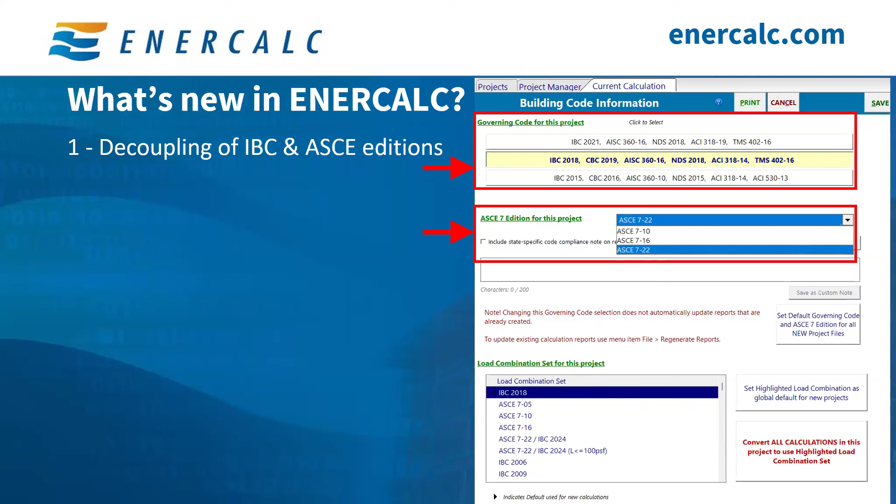This is also applicable to load combinations. Load combinations have always been decoupled, so you can always pick and choose whatever load combinations you want to start from, and also use your own custom load combinations.

The second update is the addition of new ASCE 7-22 modules. We started with adding new tabs. So if you are on the latest and greatest, you will notice that in the add button where you typically go to get your calculations, we added these 3 new tabs. The first tab is the seismic loads, and we added a calculation for seismic base shear and another for seismic wall anchors. So you can do this right here.

Next, the wind load. We added another tab for wind loads, and we currently have implemented calculation modules for the ASCE 7-22 wind enclosure, the envelope procedure, which is chapter 28, and the directional procedure, chapter 27. And currently, the components and cladding pressure determination methodology for chapter 30 of the ASCE is under active development. Once it's done, it will appear right here under this tab as well.

The last tab we added is the Other Loads tab, and this currently includes a calculation for ASCE 7-22 live load reduction, but will also have some other calculations such as the snow load and snow drift calculations.

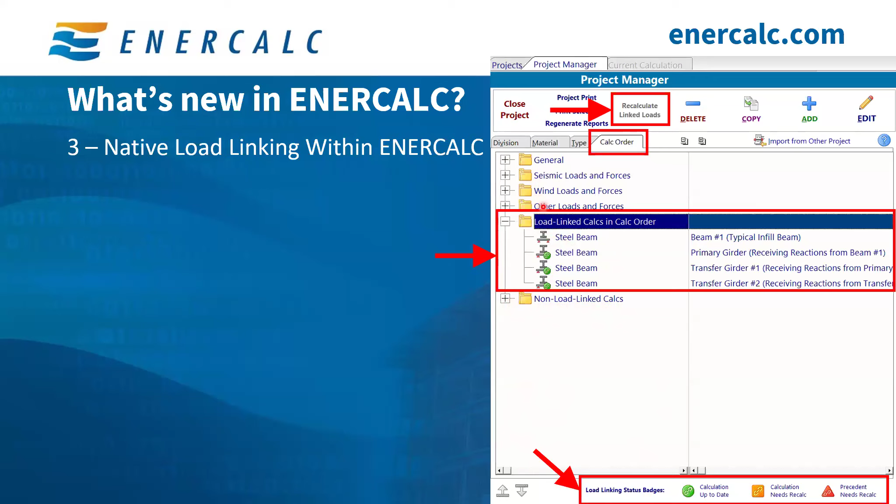Also, if you click on the Calc Order tab, you can see we have a folder that says Load Linked Calculations in the proper calc order. And if you had other calculations that don't have any linked reactions in them, you will see here that it says Non Load Linked Calculations. You can click on this to expand it and see all of the other calculations that don't utilize load linking. So this is also just good organization for you, so you can know at first glance what is going on with your calculation.

So if you are inside the steel beam calculation, you can see here that we have a brand new tab that's called Linked Loads. And you can grab whatever reactions from whatever calculations you have in your ENERCALC project file. Once you click on Linked Loads, you can see right here it says from beams, and this one says from columns. From beams will show you all of the other steel beam calculations that you've already created in this project folder, and you can pick whichever one you want to get a reaction from.

And as you cycle through these beams, this 2D diagram, this free body diagram, changes to reflect what beam you selected. This is a good way to help jog your memory in case the naming was not descriptive enough, or you couldn't figure out which calculation is which. You can always take a quick look at the free body diagram here to remember what calculation is what.

And you can also see the table right here below it, which shows the supports. So this is support 1, this is support 2. If you have multi-span, then you'll have multiple supports. And it shows you the reaction that's associated with each support point.

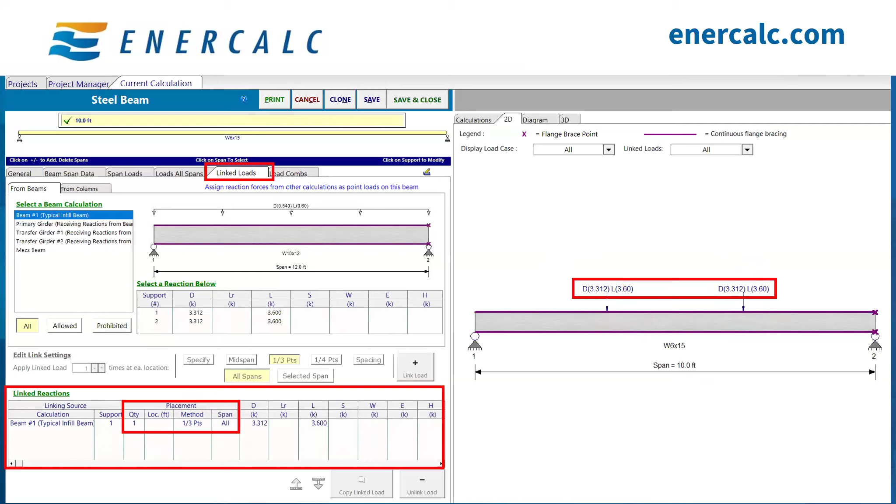Currently, the load linking feature within ENERCALC is supported for steel beams only. We want to hear from our users what we should support next. So load linking for wood beams is under active development right now. And when it's done, this means that you can carry reactions from a wood beam to a wood beam, wood beam to steel beam, and steel beam to wood beam. So every new integration we add for load linking will be functional with all of the other previously integrated modules.

So with that said, we have a survey for our users to tell us which module we should implement next. If you remember earlier, you can grab reactions from beams, and there was another tab right here that says from columns. If you click on that tab, you will find the link to the survey right here. We here at ENERCALC prioritize implementation of feature requests based on how many users requested. So that's how we picked the load linking of wood beams as our next candidate for development. But as of today, we have not decided which one to develop next.

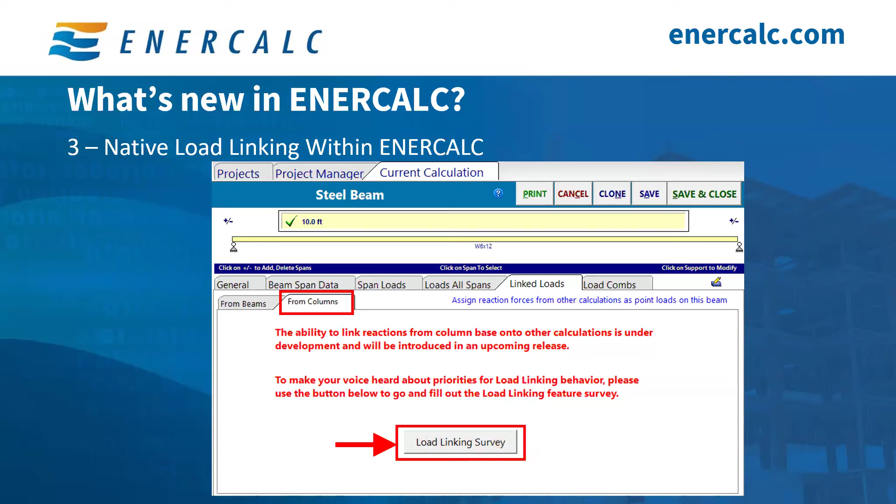So after the wood beam module is done and integrated, whatever the survey results tell us, we will go in that direction. So if you're interested in wood columns first or steel columns, please go ahead and cast your vote here, so we can take the development of our software in the direction that our users would like.

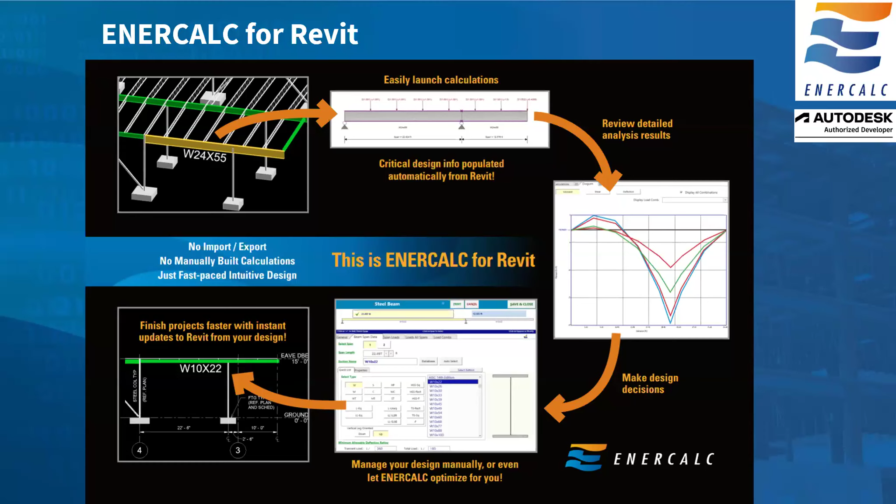So the idea behind ENERCALC for Revit is the schematic you see on screen right now, which is to basically start with your raw Revit geometry, easily launch calculations, interact with those calculations, and make design decisions in the environment that you're familiar with, and then progress into actually making design decisions and pushing information back to the Revit model in real time.

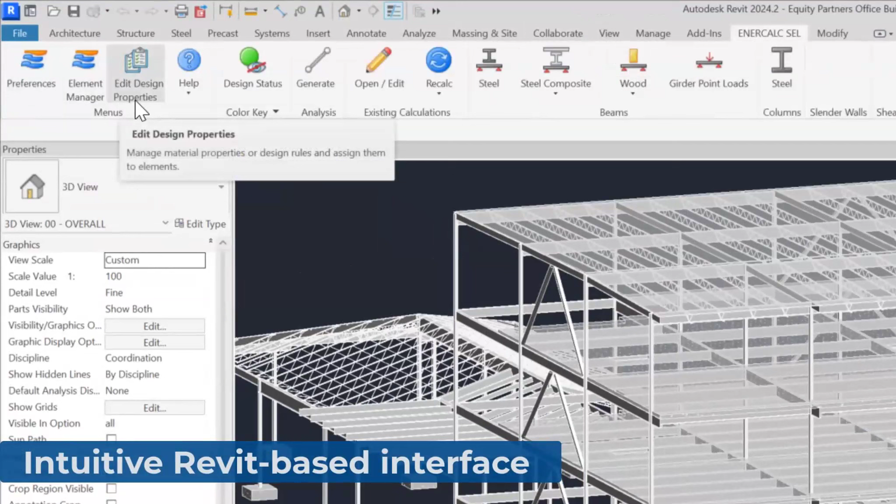So this workflow starts with a Revit-based interface when you install the ENERCALC for Revit add-in, the same environment where you would find your structure tools, your annotation tools, your collaboration tools. You'll find a new ribbon bar for ENERCALC, and this is where you find preference settings, element manager views to overview your calculations, color-coded slide-out legends to manage status and design completion, calculation launch and design option windows, the ability to actually generate your calculations on the fly from Revit geometry.

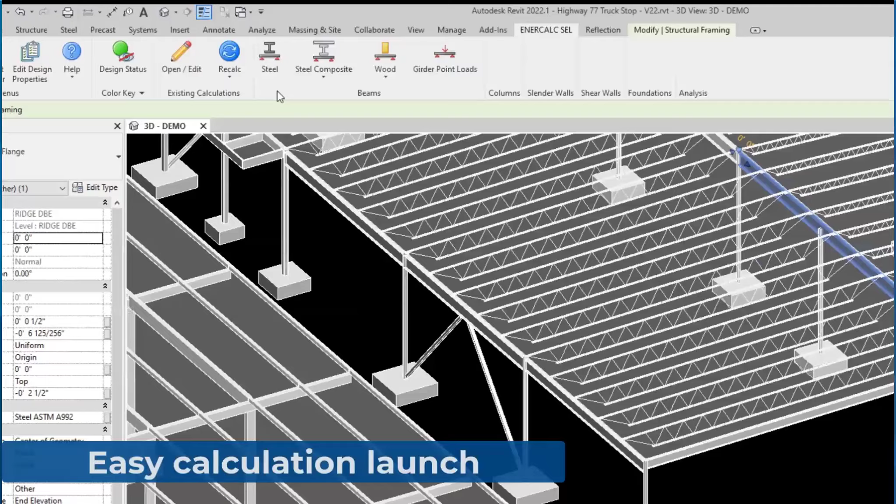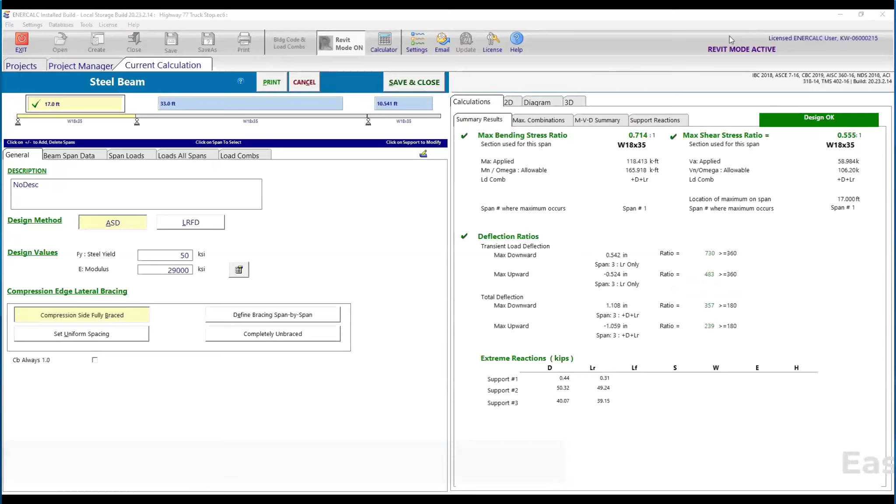So these calculations are actually created using what we call a one-click or a point-and-click launch process, where you just literally start by designating the physical element you want to create a calculation for, specify the type of calculation you want to create, and what this will actually do is begin to walk you through a launch process where you're actually taking advantage of real Revit geometry for things like support conditions, connective framing relationships, tributary framing conditions, a variety of information to actually build a complete replica in the ENERCALC calculation environment of the physical element that you just specified in the Revit model.

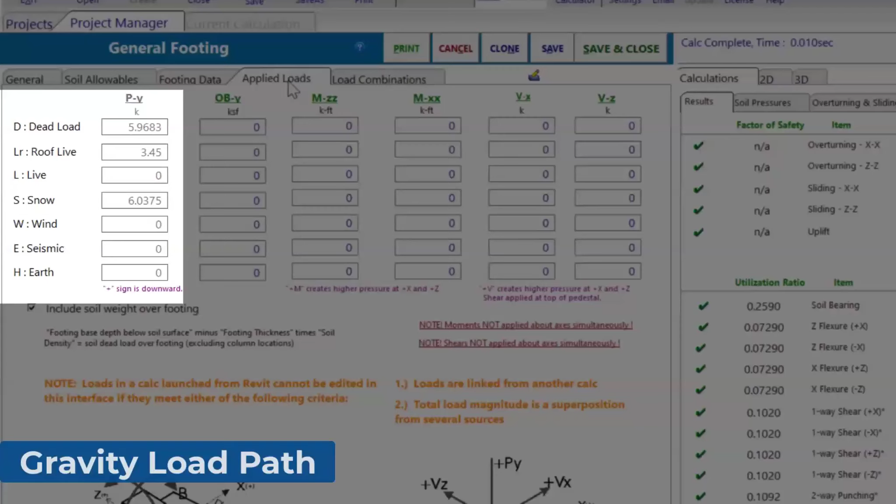So this opens up a whole variety of capabilities and productivity enhancements, including things like the ability to seamlessly move loads vertically through a structure, for example, from beam to a girder, to a transfer post, to a transfer girder, to another column, to a foundation, seamlessly inside the Revit model using physical model geometry, not having to curate analytical geometry on the fly, using the data that your structural engineering team has already generated to make your documentation look right, to perform your multidiscipline coordination, and so on.

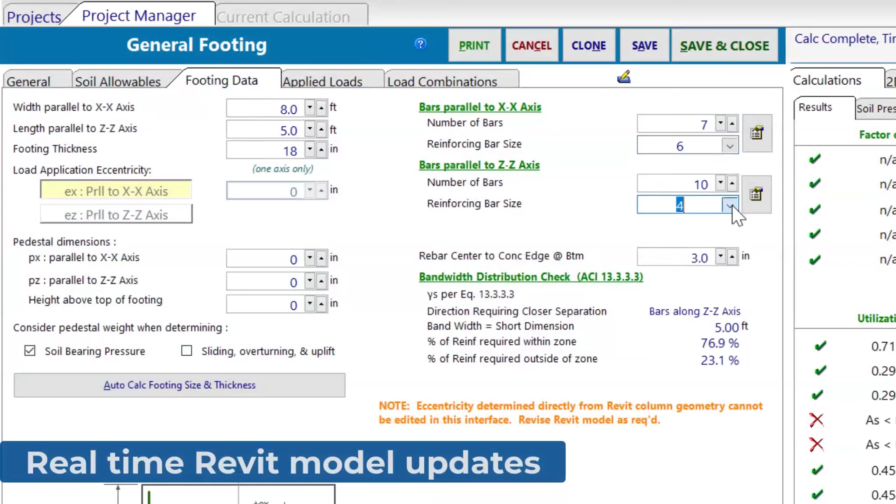And then obviously, you want to be able to short circuit the process of transferring design information from your calculation environment back to your documentation. And so the ability to push changes on the fly from an ENERCALC calculation back to the Revit model in real time will shorten your design times, accelerate your work, ease the documentation process by cutting out manual work and manual transcription, as well as reducing the risk of errors.

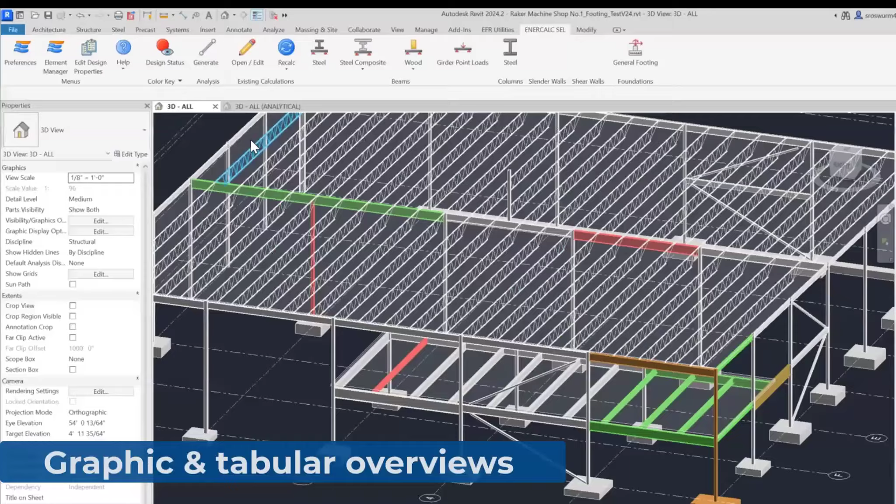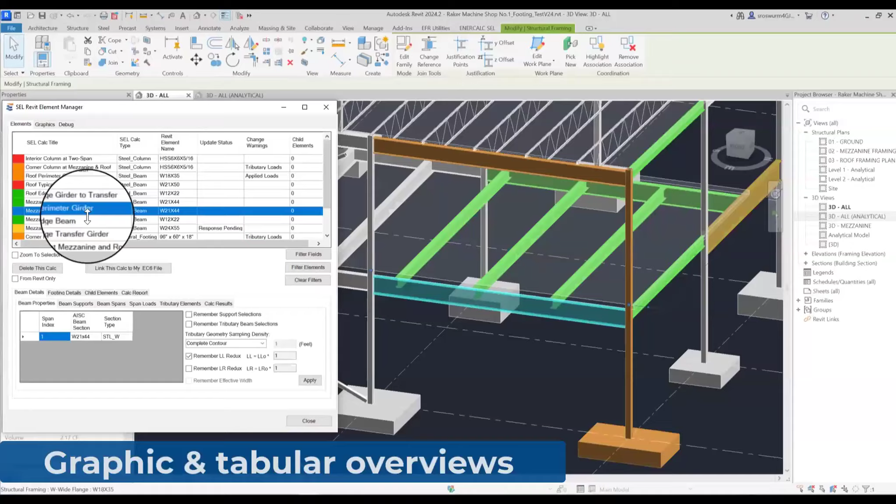Now, because Revit is such a rich graphical environment, ENERCALC for Revit also gives you the ability to have a lot of rich visualization of your design process. That includes everything from color coded design status and warning statuses to tabular views of your calculations, two-way navigation between tabular views and the actual model so you can see which physical element corresponds to which calculation, as well as vice versa, seeing which calculation correlates to which element if you want to navigate the tabular view or the model view. It's easy to see that correlation.

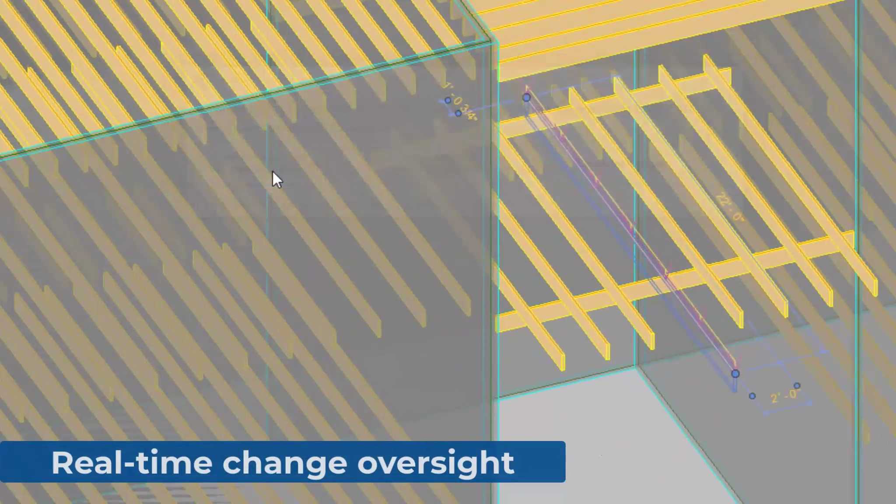Now, if there's one thing about a structural Revit model that never changes, that would be the fact that the model is going to change. And so when those changes do occur, you need the ability to stay on top of how those changes are going to affect the validity of your ENERCALC calculations. ENERCALC for Revit has a robust framework of monitoring systems that lets you be aware when critical geometry changes alter or modify the status of your calculation. And when those natural changes and evolutions do occur over time, you're going to have the ability to stay on top of them, know what changes have happened, understand why those changes occurred, and then go and take action accordingly.

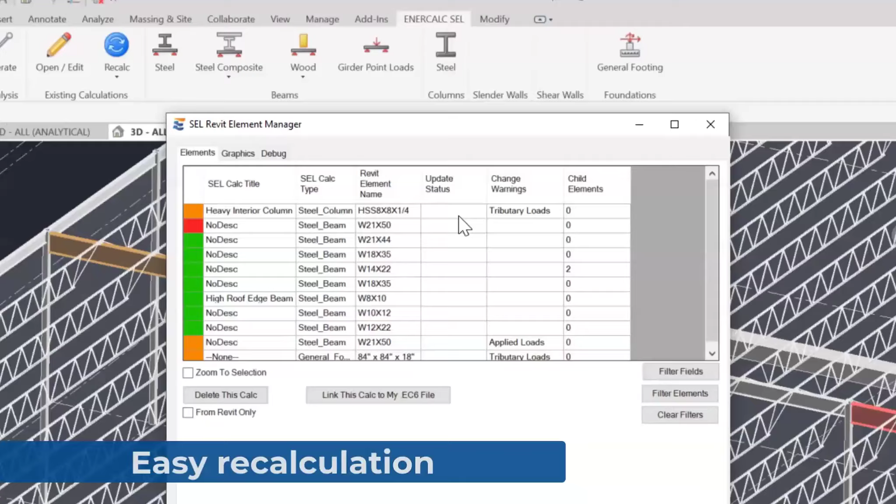For example, when we see that a whole framing system has undergone changes, we can now go and use ENERCALC for Revit's easy regeneration or recalculation tools to address those on the fly. So everything you guys are about to see includes the same version support that Autodesk provides for Revit itself. So that's the current version and three historical versions for a total of four.

ENERCALC for Revit uses that same approach. And so currently we support Revit 2022, 23, 24, and 25. It's usually in April when the next version of Revit drops. And so when Revit 2026 becomes available, probably this coming April, then we will eventually deprecate support for Revit 2022 and you'll see us release support for 2026.

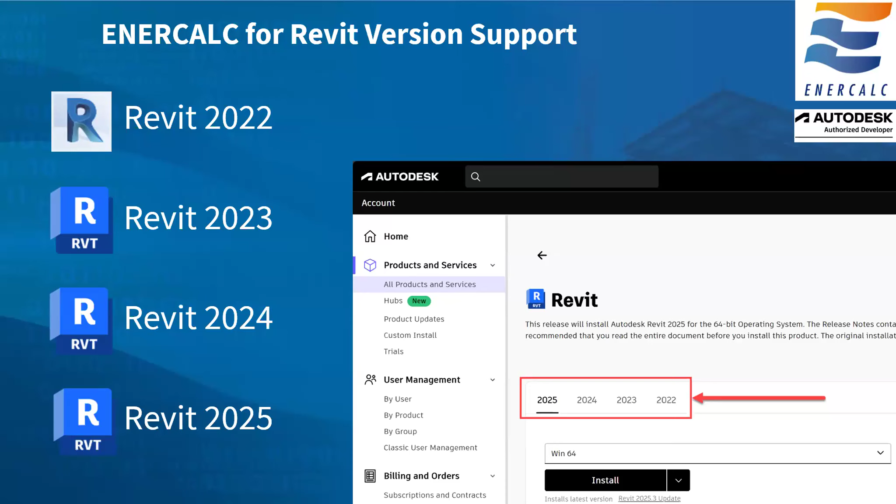So let's go ahead and dive into some real workflows and see how ENERCALC for Revit works and what that workflow actually looks and feels like. So, like I mentioned earlier, the process of creating a calculation is about as easy as it can be. We're just going to say we want to launch a steel beam calculation on this example here. As soon as we do that, a couple of quick approval steps help us condition that calculation with things like span geometry and support conditions.

And so what we see in the ENERCALC calculation is a geometric replica of this physical element in the Revit model. We can interact with this calculation just like we could a manually built calculation. We can make design decisions. We don't have any loading information on this beam right now because we sent raw geometry from the Revit model, but we can go ahead and manually create some load information via the Loads All Spans tab.

Now we can start to look at our moment diagrams. We could look at our unity check information, and we can make a design decision that we actually want to see applied back to the Revit model in real time. So for example, let's move our section size from a W16 down to a W8x10.

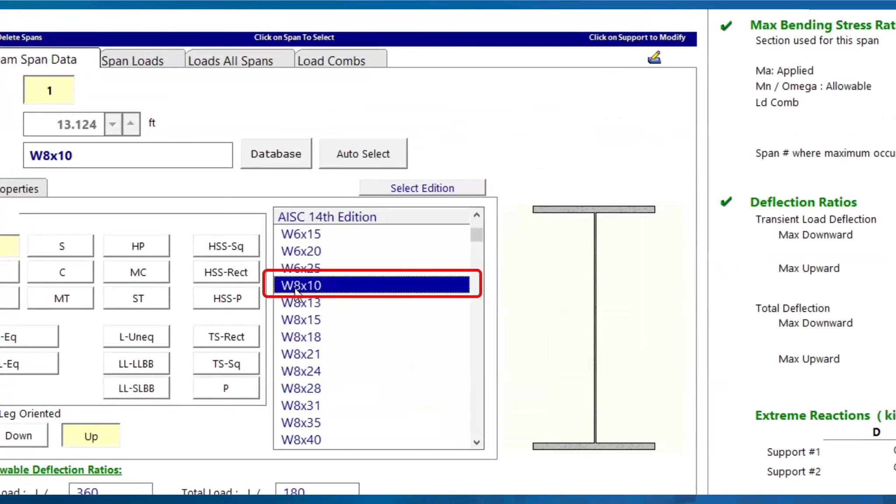Now, when we go through the save and close process, this is not any kind of an import export. This is not a manual file exchange. This is just a real-time synchronization from a single button click. And what we see now is our W8x10 section size reflected back to the Revit model. We see the linear loads we applied to that element. We see the title that we gave to that calculation, all summarized here in the Revit model.

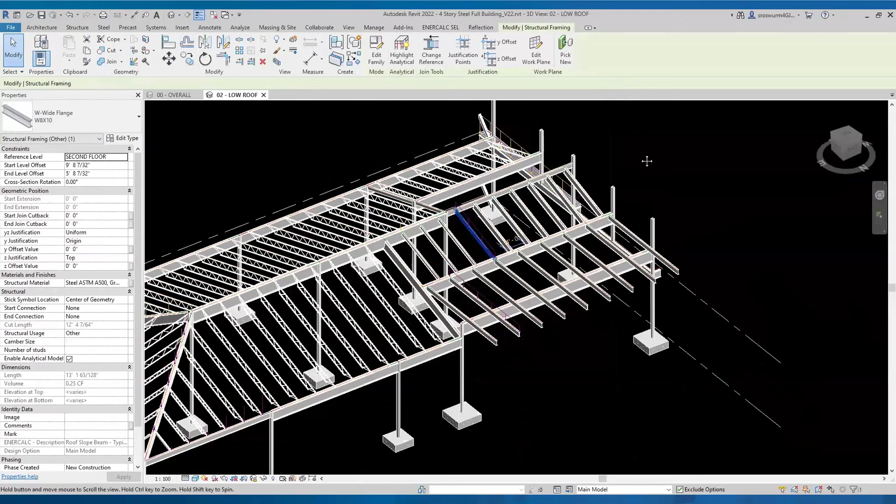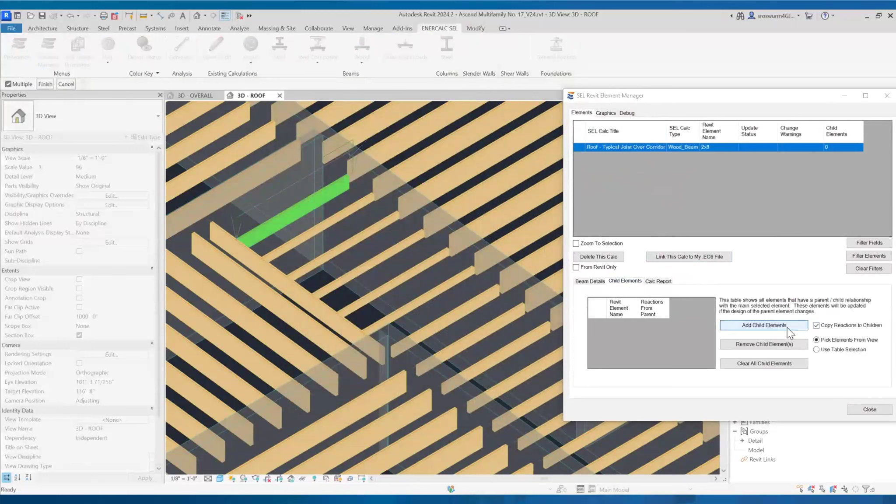Now, springboarding from a basic singular calculation to another common design challenge, I want to talk a little bit about groupings of elements. This is a common thing you run into in a Revit model where you want to be able to manage the design of multiple physical elements, but obviously you don't want to create redundant calculations that are very similar. So ENERCALC for Revit provides the ability to do this using what we call parent-child groupings or parent-child associations, where you can take a single controlling calculation and assign it to multiple physical elements in the Revit model.

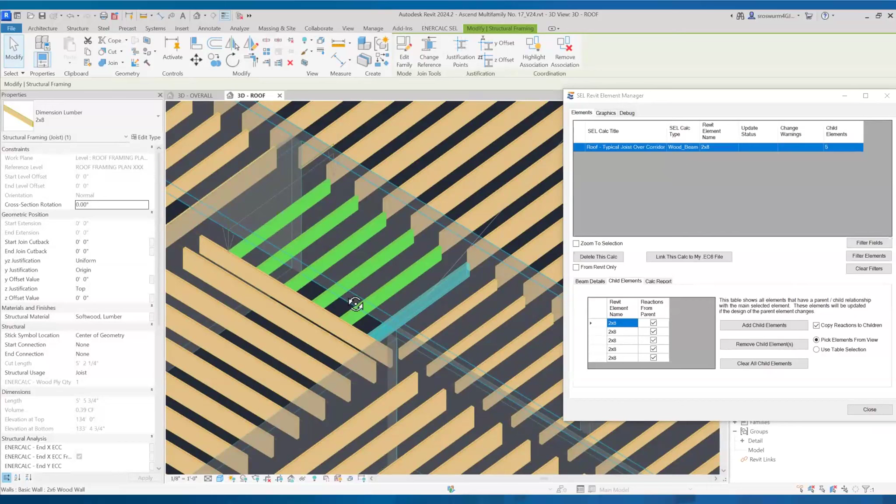When you create that association, then all of those physical elements will automatically take on the same design characteristics as the parent calculation. So in this case, we saw all of these wood joists automatically move from their default 2x4 size to the 2x8, dictated by the parent calculation. Now, if we take that a step further, now that that parent-child association has been assigned, we can make a critical design change to the parent beam that manages all of those child elements in the physical model. We can go change the section size, for example, from a 2x8 back to a 2x6 or even a 2x4.

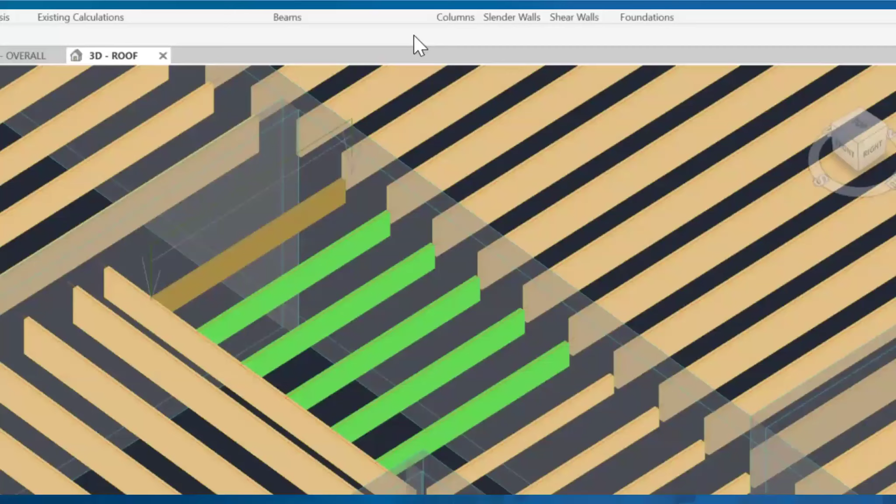And when we save and close, we'll be able to see that those size changes are applied not just to the parent beam in real time, but also to the child beams. And then we have real-time awareness of the pass/fail status unity-check-wise for all of those elements and not simply the parent beam.

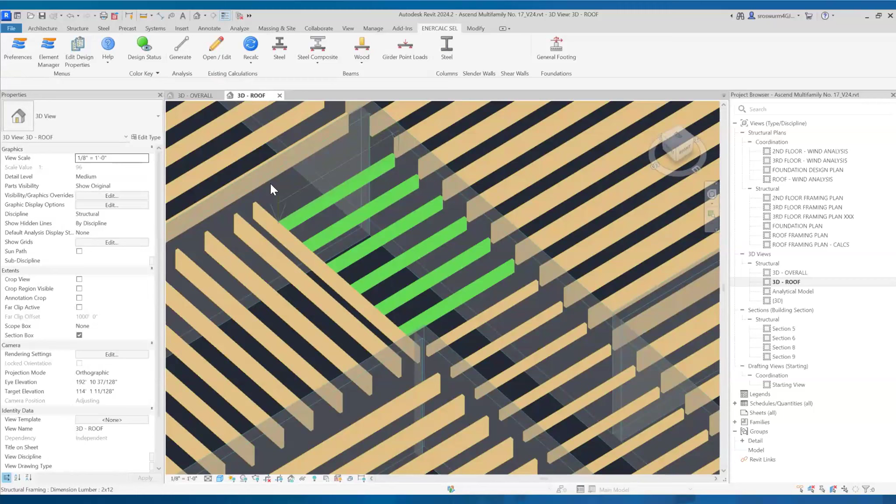So, taking this workflow a step further, you may or may not have noticed that when I created that parent-child association, I also ticked a box that says copy reactions from the parent beam to the child beams. So, what that means is each of the child beams that we assigned to this parent also reflect the end reactions from the parent beam analysis. And so that prepares us to go ahead and proceed directly into a girder design, for example, this header that supports all the corridor joists in this project.

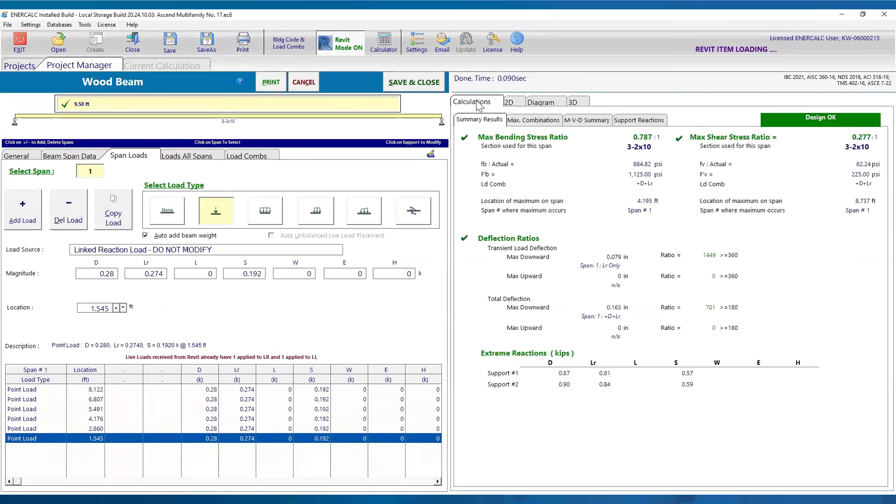We can go ahead and verify that there is a connective relationship between the infill joists and the header, and we'll see that the reaction forces are automatically associated from the end of the joists to the girder as applied loads. And so this is similar to the load linking workflow that Max showed a moment ago, except that this is occurring seamlessly and intuitively on the fly using spatial connective relationships rather than having to manually associate things.

So, those two load linking examples that we just looked at a moment ago, the infill beam example, and then linking those from a beam to a girder, assume that you're in a situation where you've already gotten the chance to do infill beam design. But if you're very early on in a project and you need information quickly, or if your infill elements are manufactured products where you're not going to do an ENERCALC design, you may find the need to quickly generate results for a girder without having infill beam reactions that you can link.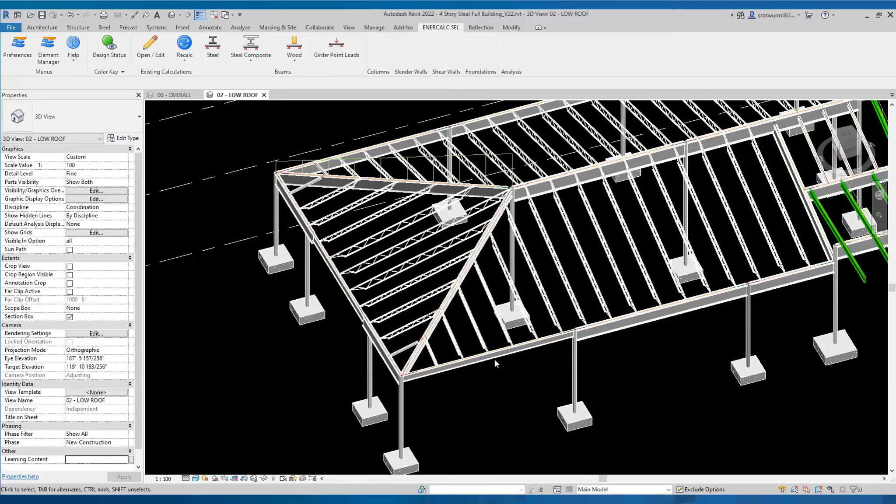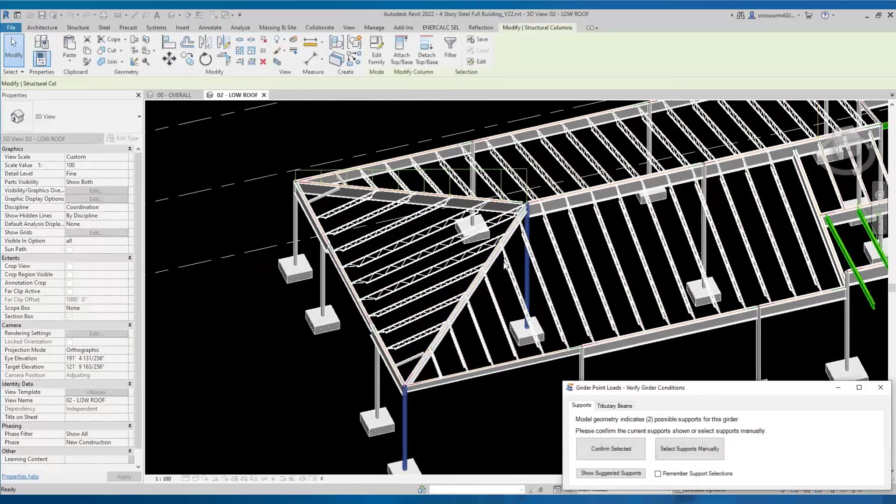ENERCALC for Revit gives the ability to do that on the fly using what we call the girder point load generator. And so, for a situation like this hip roof girder that we see at the end of the building, rather than having to approximate this as a trapezoidal load, which would still require a lot of manual calculation, we're going to use the girder point load generator to generate real reaction forces that would apply to this girder using the tributary width geometry and the span geometry of all the infill joists that frame into this girder.

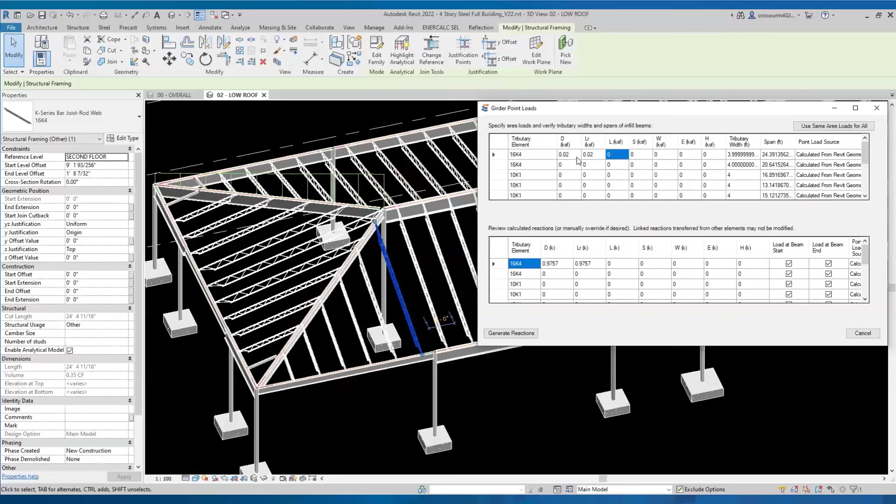So there's no deck and area loads on this particular roof area of this framing system, but we could walk down this list and see the physical joists, and we can go ahead and key in the magnitudes of area loads we want to use to generate reactions on the fly. We can copy that down and use it the same for all, generate those reaction forces, and now what we have is physical point loads in the Revit model at the appropriate span relative locations representing each of the joist seats where these infill joists connect to the girder.

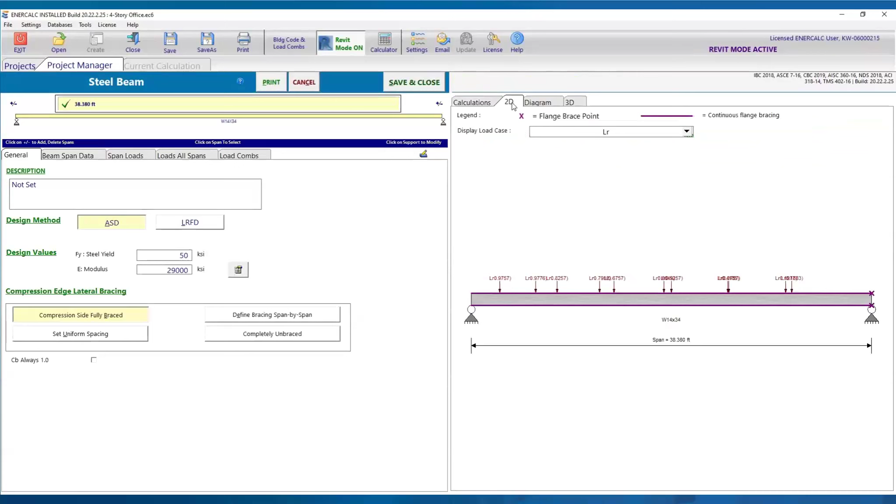Now we can proceed directly into the calculation for the girder, launch that calculation just like we did a moment ago. And when we do that, what we'll see is a perfect ENERCALC calculation replica of that hip roof girder, the actual slope distance node to node from the start of the beam to the end of the beam, with all of those point loads automatically associated to the appropriate span relative locations without needing to manually calculate the point loads and without needing to somehow snap dimensions along the slope distance and skewed distance of that beam to find out where they should be applied.

So, continuing to add to these workflows and take things a step further, let's go ahead and turn our attention to load paths. So, we did some simple linking from beam to girder just a moment ago, but we can continue to extend these workflows to multiple layer framing systems. For example, where we have infill joist, we have girders, we have beams, we have transfer girders, and now this all ties into a column. And so, with this column load situation, we can go through a similar workflow and go ahead and launch a steel column calculation, again, taking advantage of Revit geometry on the fly to build that calculation.

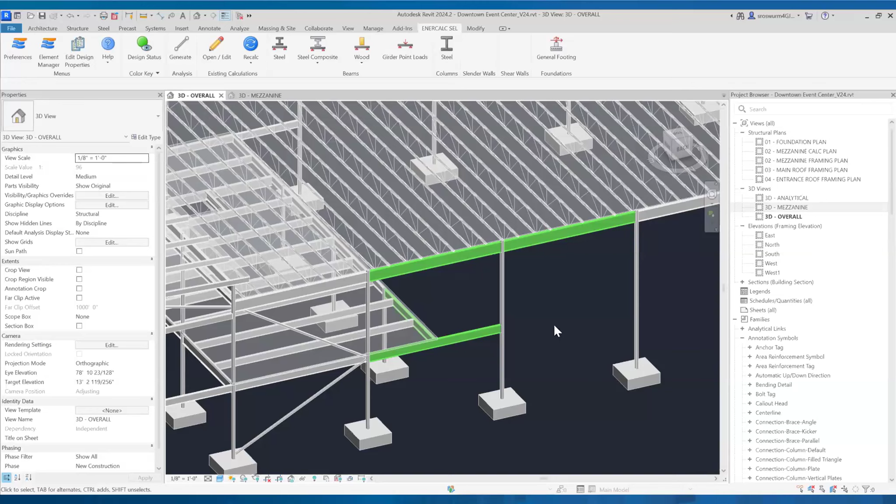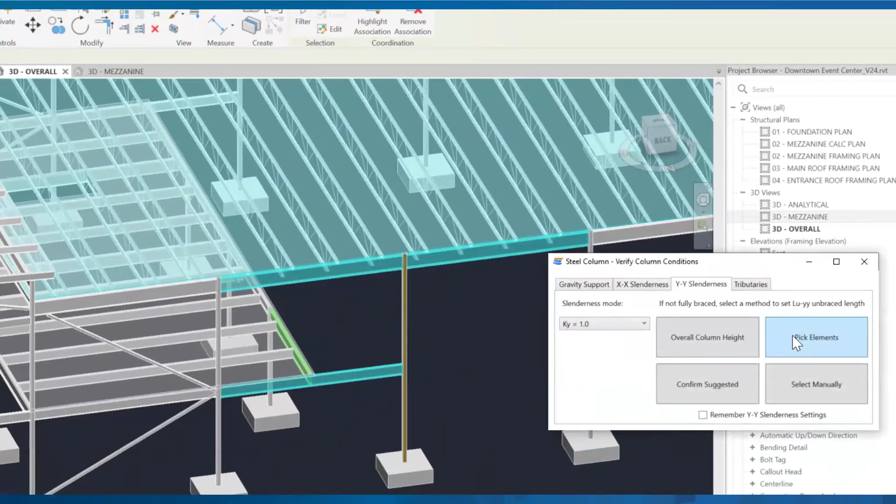And so if we go through the launch process for a steel column, we'll see a similar launch window to what we saw for the steel beam. The most notable difference being that for a column, rather than building span geometry, we're building a column slenderness profile. And so we're looking at slenderness about the XX. We can set a K value. We could specify overall height, or we can use the Revit model to infer on the fly what our bracing conditions are by physical intersection. The same about the y-axis, we can specify a Ky value. We can ask ENERCALC for Revit to show us the most plausible bracing points for slenderness. And we can even see tributary relationships for connective situations where load is going to be transferred.

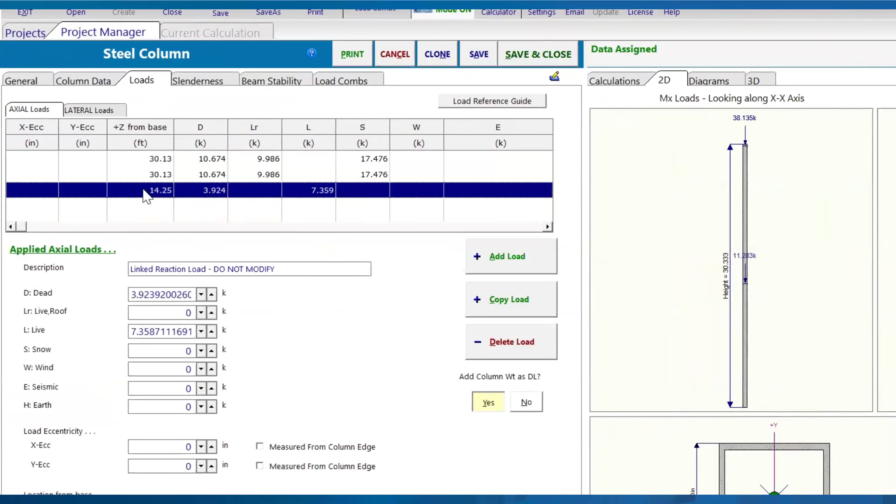And so when the steel column calculation loads, we can go to our 2D diagram and see we have two different levels in the building, the top of the column and approximately mid-height of the column, where three different sets of point loads are being transferred because of those three girders that tie into this column. We can look at our calculations. Just like we did before, we can make design decisions, things like changing section size, watching our results to see how they respond, whether that be a 6x6, an HSS 8x8, what have you.

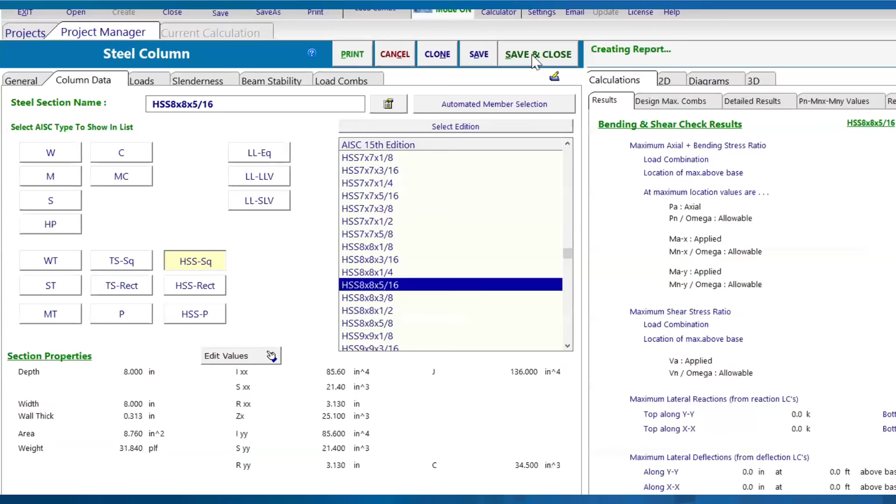As soon as we make that design decision and we're ready to save and close, we'll be able to easily push this section size change seamlessly back to the Revit model in real time. So instead of having that extra step in the process where the engineer makes markups, hands the markups to a junior engineer or a BIM technician, instead we're able to make that change seamlessly and intuitively as part of the design process.

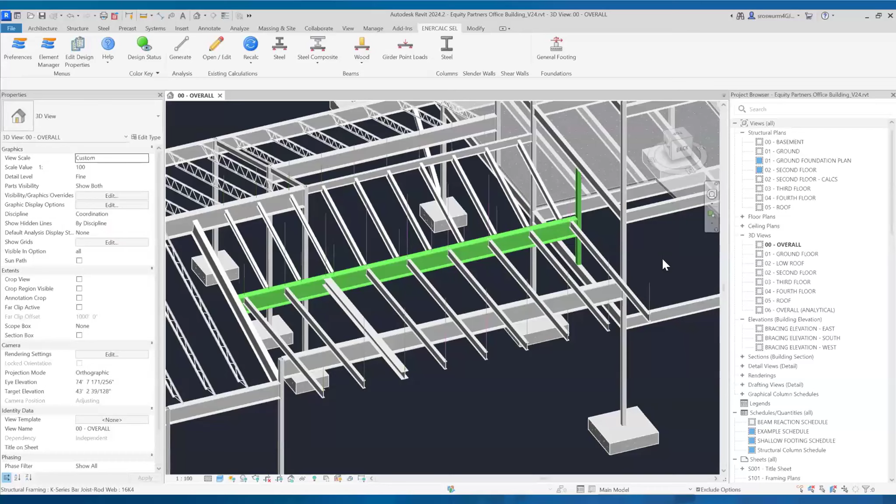Now, obviously, the ability to tackle gravity load path and the ability to handle columns also opens the door for really interesting situations. For example, transfer post or transfer column situations like we see here, where we have a girder into a column, perform the column design, and then we can perform design for the transfer girder, which underlies. And we can manually specify support conditions in order to clarify and make sure we get the exact load transfer that we're interested in.

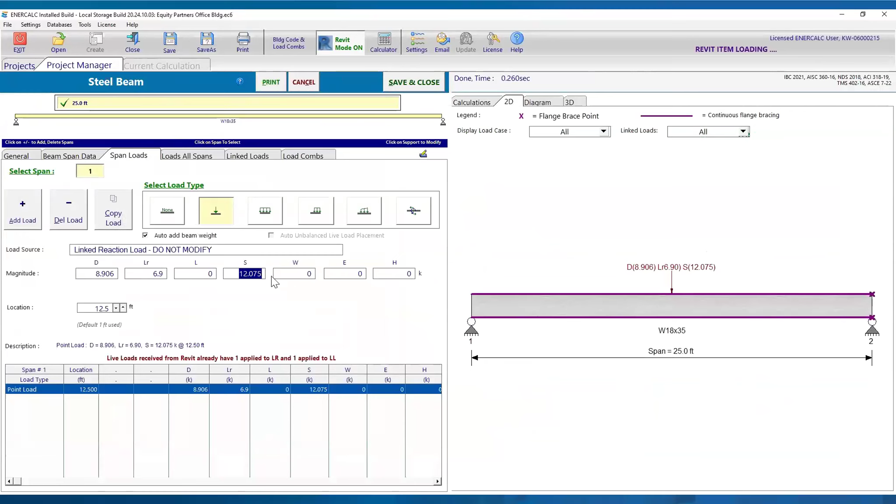And so as we go ahead and get into this calculation, we can see the point load, which represents the axial force in the column transferred to a vertical demand at the midspan of the transfer girder, all seamlessly transferred in real time rather than having to manually carry from one calculation to the next. So increased speed, increased accuracy, increased ease of creating these calculations rather than having to measure and manually build each one of these.

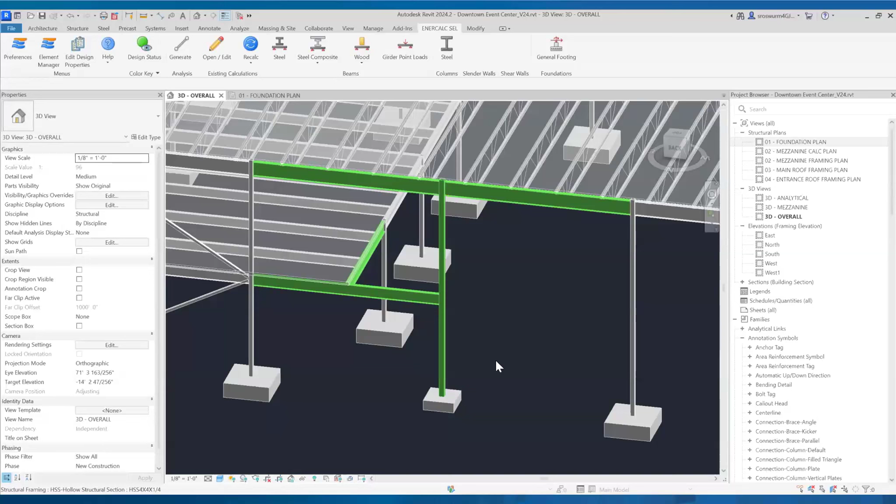And now, because of the spatial relationships and the adjacency and proximity that we have going in the Revit model, we can go ahead and continue to extend this workflow into foundation design because we have a connective relationship between the column and the general footing here. And so if we go ahead and launch a general footing calculation, we'll be able to see in the same way we have all of our footing geometry.

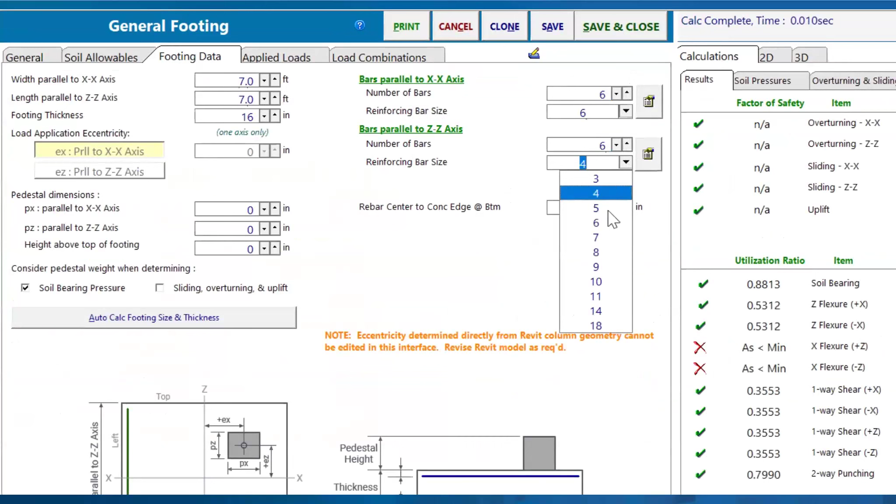For example, the default 4 foot by 4 foot footing, we can modify that geometry to make sure we're passing our bearing capacity. We can look at our rebar inputs and begin to modify the rebar that we want in each direction at the bottom of this footing. In this case, we're going with 6 No. 6s. And then when we save and close, we'll be able to see that ENERCALC for Revit is actually making open-ended geometry modification on the fly on our behalf rather than having to manually toggle. And there's a couple layers to that.

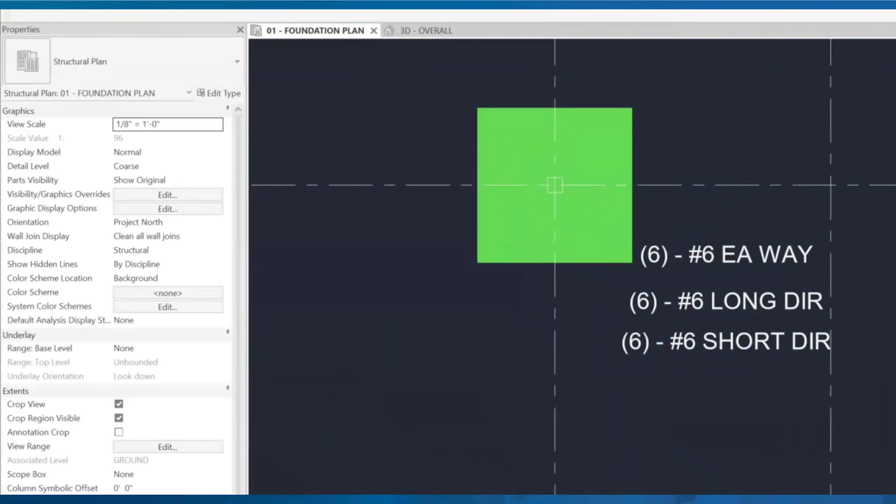If we go to the foundation plan, we'll also see that we have the ability to tag this information on the fly using Revit native parameters, which can be shown in either tags or schedules, and all that information is pushed seamlessly back to the Revit model in real time. Now, obviously, the open-ended geometry modification is a lot more interesting than a simple situation like AISC section size, where you're simply toggling on the fly.

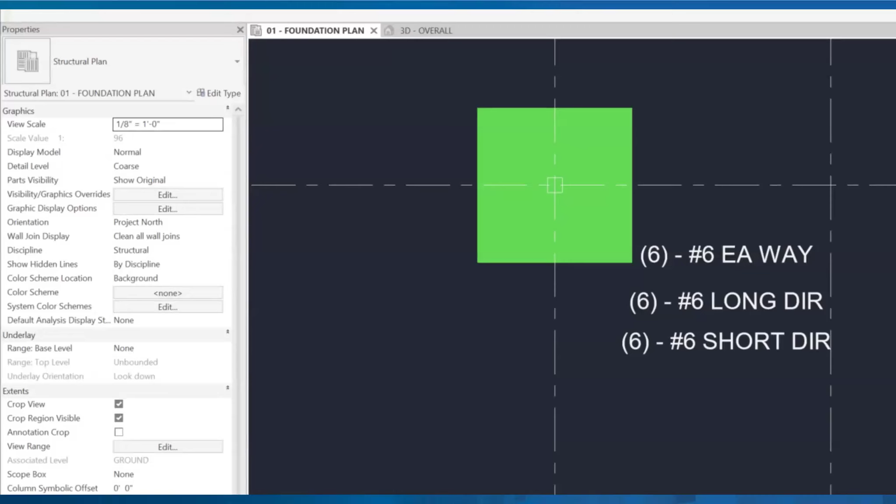ENERCALC for Revit gives you the ability to either specify a size that already exists as a type within the family you're using for this foundation, or if a type of the proper size doesn't exist, it can be generated automatically on the fly when you perform that save and close operation. So again, shortening that feedback loop, using the real geometry in the Revit model, and accelerating your documentation process to do the same work that your team does, but do it faster and more accurately.

So all of those early examples we looked at were in that low roof area of the building where we didn't have any deck, we didn't have any area loads because there was no deck present in the model. And even if your structural team has never worked with Revit area loads before, it's definitely worth taking a look just because of the productivity enhancements you can get as a result of that. So we're going to turn our attention to the second floor area of the building and take a quick look at some Revit area loads and how we can do infill beam design and even girder design, taking advantage of Revit area loads.

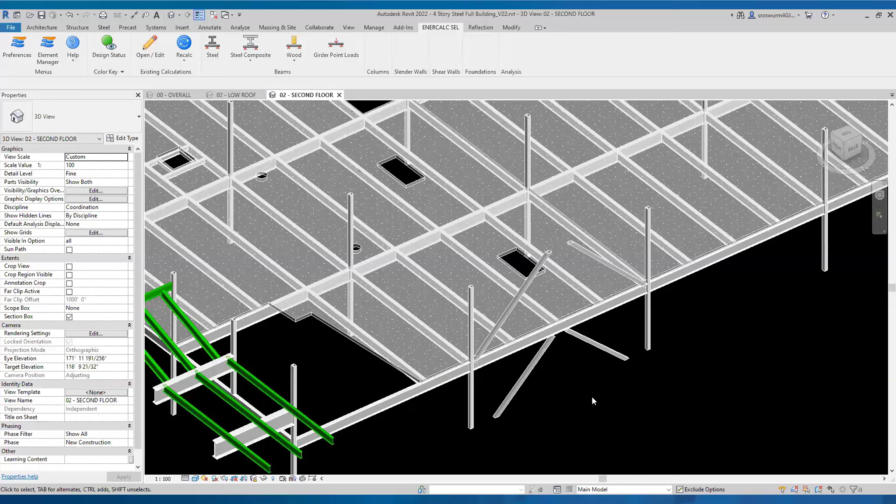So if we go ahead and toggle the visibility so we can see the area loads that are present on this second floor, we've got a couple different areas of the floor. We have a storage area and then a typical occupancy area, which is just loaded at 80 PSF live and 35 PSF dead. And so if we were to grab one of these typical interior beams and launch a calculation for it,

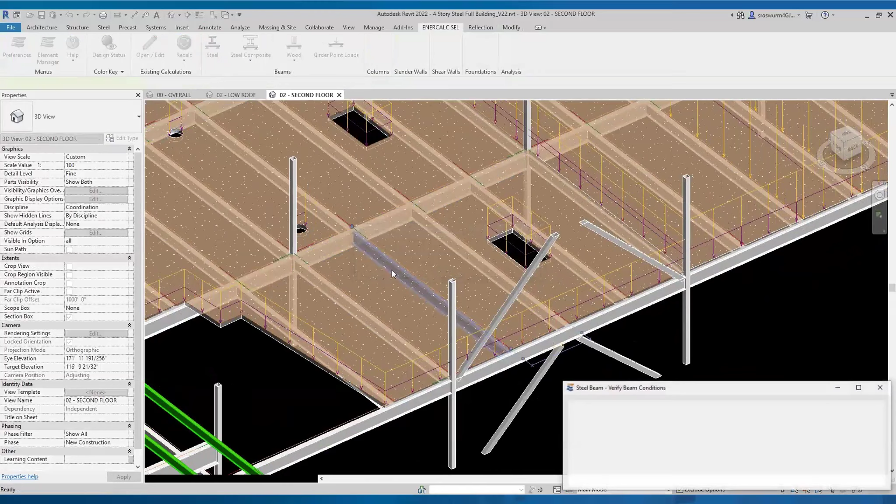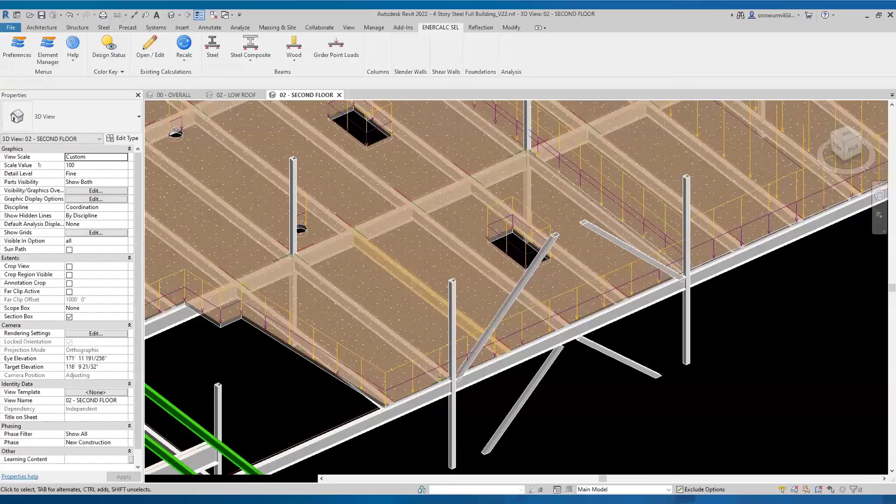what we would see in the ENERCALC environment is that this beam comes in already loaded with a linear load, and we can see that it's broken down 35, 80, 7 feet of tributary width is automatically detected on the fly from the Revit model because of the real geometry that your team has generated. Now, that was for a simple interior beam, but we can also look right next door at this beam with the mechanical chase opening.

We can launch a calculation for that beam, and we'll see segmented loads, which represent the changing tributary width as we go from outside the opening to the opening and so on. We can also look at situations where we have a stepped and skewed linear varying slab edge with a discontinuity, and we'd be able to launch a calculation for that and see trapezoidal loads, linear varying loads with a discontinuity

in between. You can do the same thing, for example, on a beam that falls at the boundary between a more heavily loaded and more lightly loaded area of the floor, where in this case, we're going to see these loads broken down as two individual line items, one which represents the tributary effects of the more heavily loaded floor on one side, and then one which represents the more lightly loaded area.

We can also look at loads that vary span by span, for example, on a canopy beam, which has a backspan at occupancy loads and a cantilever at canopy loads. And in this case, we'll be able to see that we have it broken down with our 20 and 20 at tributary width on the cantilever and our 35 and 80 in the other location.

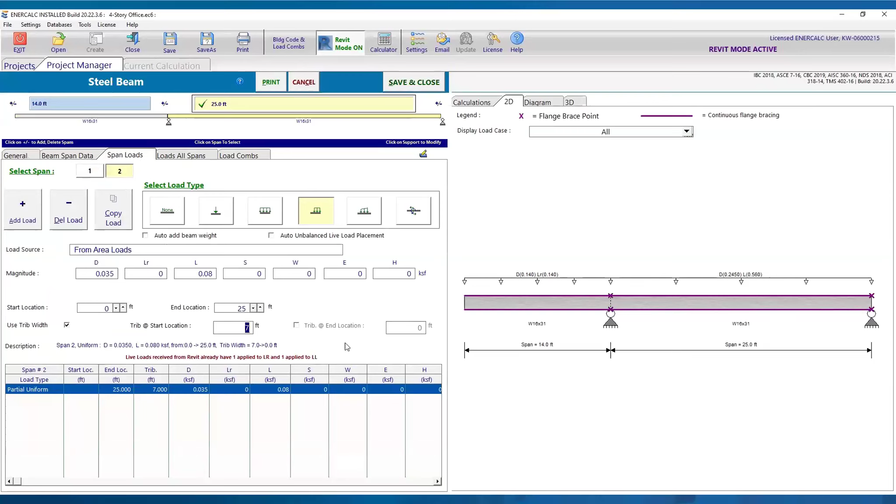So speaking of second floors, it's worthwhile to talk about composite beam design, since that's another extremely geometry intensive design process, and one which takes advantage of a lot of the physical information in your Revit model, including span geometry, effective width, and many other things. So I want to briefly just talk about steel composite design within the context of ENERCALC for Revit as an example of combining area loads, floor geometry, beam geometry, and more.

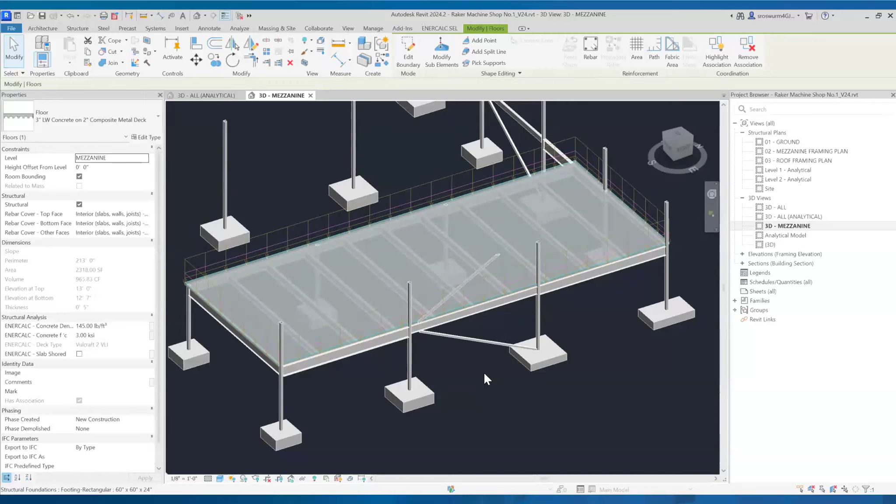So ENERCALC for Revit gives you the ability to manage design properties intuitively right inside your Revit model. In this case, we're talking about things like editing your deck type. You can choose a deck type from a manufacturer profile. You can also set mechanical properties all across your Revit floor.

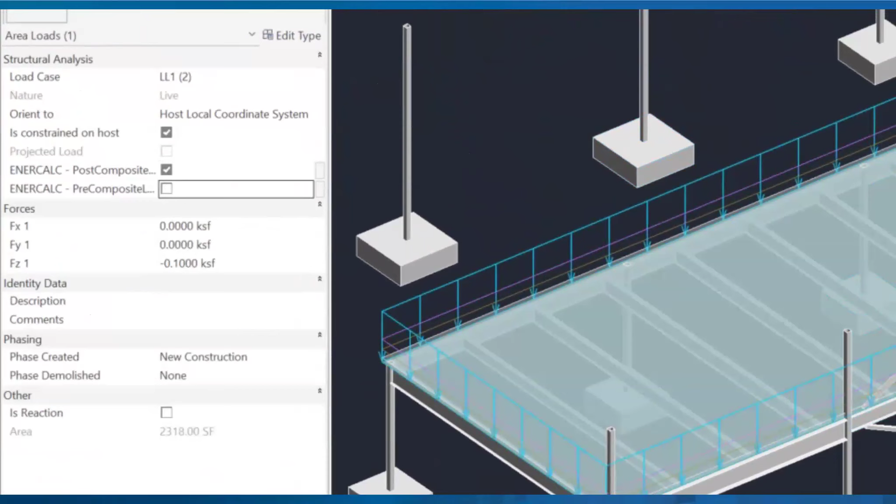And then we can also turn our attention to loads and actually set our sequencing using these simple checkbox parameters right here. For example, we have a live load that's post-composite only. We have a construction live load, which is pre-composite only, and we can set that accordingly with these checkboxes. And then we have a dead load, which is permanent, meaning that it's going to be post-composite and pre-composite.

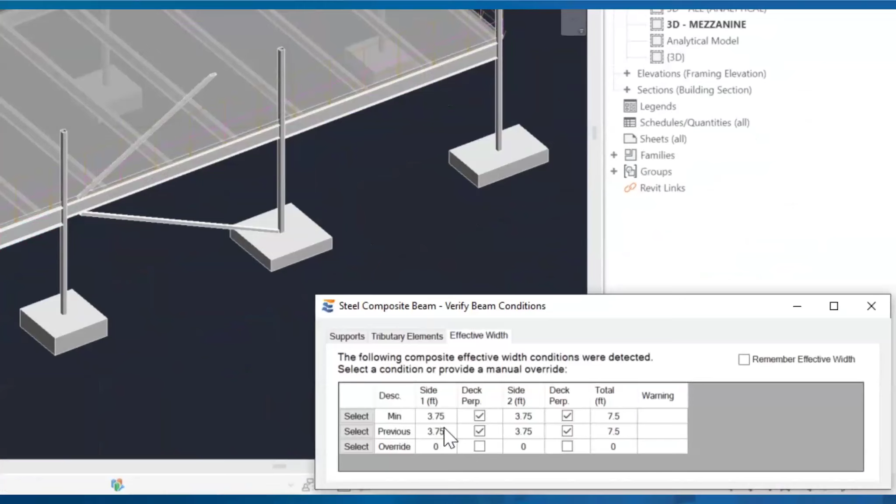And once we've made those designations, we can proceed directly into a calculation launch, just like we would in any other scenario that we've seen so far. We go up and designate, we're going to launch a steel composite calculation, select one of these beams, and the only difference we'll see during that launch process is that ENERCALC for Revit is automatically detecting your effective width geometry for the composite beam on the fly.

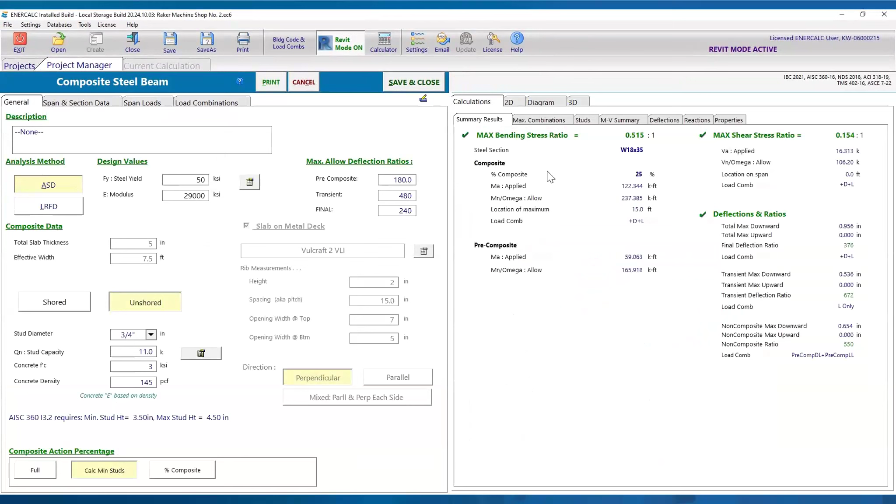And so when we start to look at our calculations, we can see that our loads have come in sequenced exactly as we specified. We can also go and look at our 3D visualization for our effective width geometry that's been detected from the Revit model on the fly. And we can look at design decisions, for example, like calculating minimum studs, what our stud quantities are, what our reaction forces are, if we need to document those as part of our design.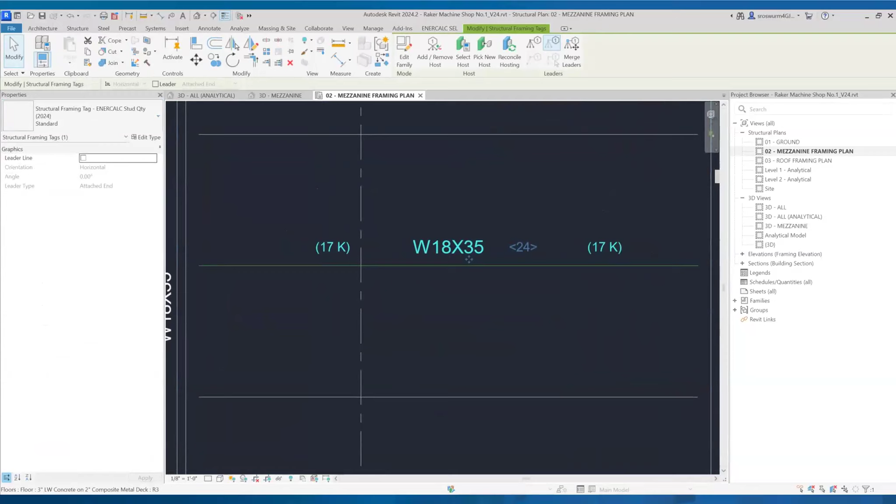And we can even go to our framing plan and see where this information can be exposed using a tag. So we have an existing tag here, which we can toggle to an ENERCALC tag type. And this will let you actually seamlessly display on your plans things like end reaction forces, stud quantities, section size, and more. So that's kind of a natural segue into accelerating the documentation process, whether you need to document reaction forces only, whether you need to document stud quantities.

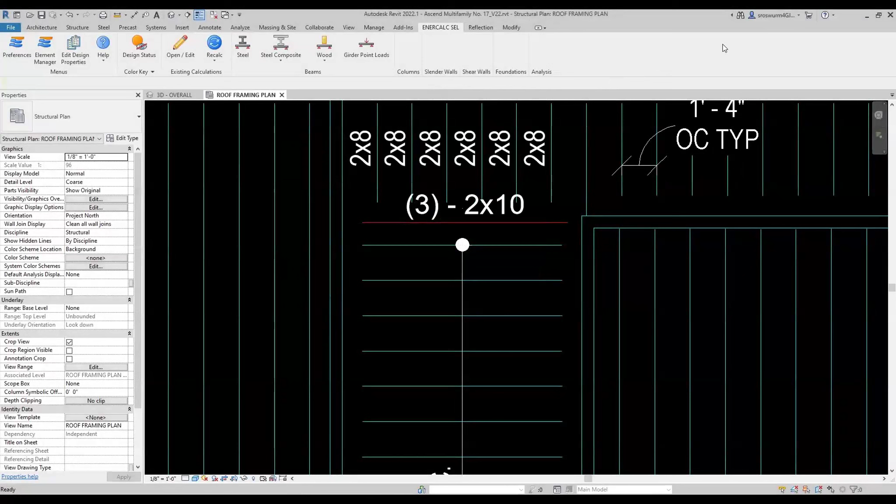If you're working with wood design, for example, let's say you have a multiple ply dimension lumber situation with a multi-gang dimension lumber, you can toggle that size and see via Revit parameters how that multi-gang section size is being designated, tag that on the fly instead of needing to tag it manually.

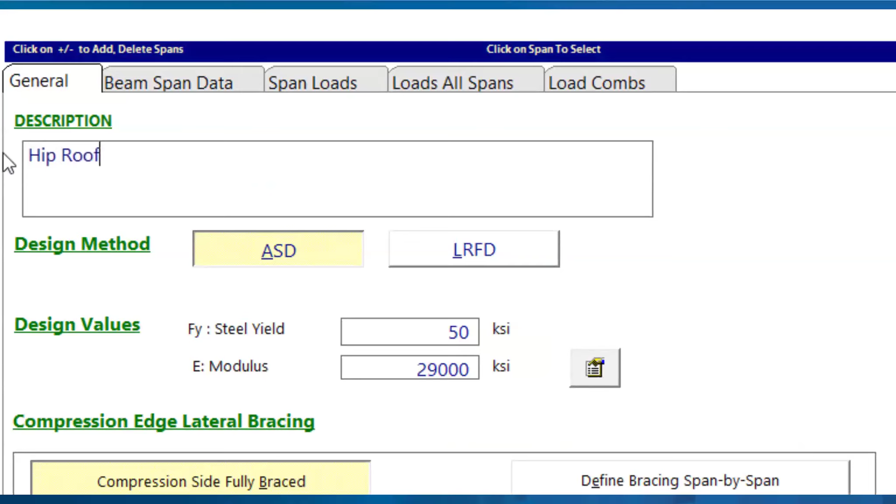Now that's using tags that actually pertain to design information, but you can also tag other supporting information if you're wanting to do calculation plans or various forms of coordination. All the titles and names that we assign to these calculations on the fly can also be exposed via tags or schedules so that you can correlate them between the physical model and a physical plan to your calculation package in a PDF.

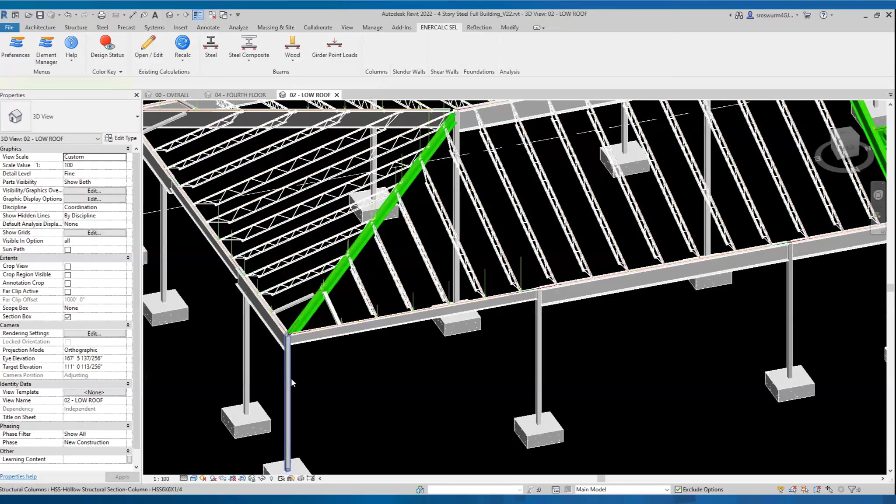And one of the final things we're going to talk about before we wrap up and go to our Q&A today is just the concept of changes and change monitoring. So obviously, if a Revit model undergoes a critical change, for example, removal of a support, you need to be able to be aware of that and undo that if the change was unintentional. But if that change was intentional, you do have the ability to keep that change and place appropriate warnings on the affected elements. For example, in this case, a girder support was removed. Now the girder calculation needs your attention.

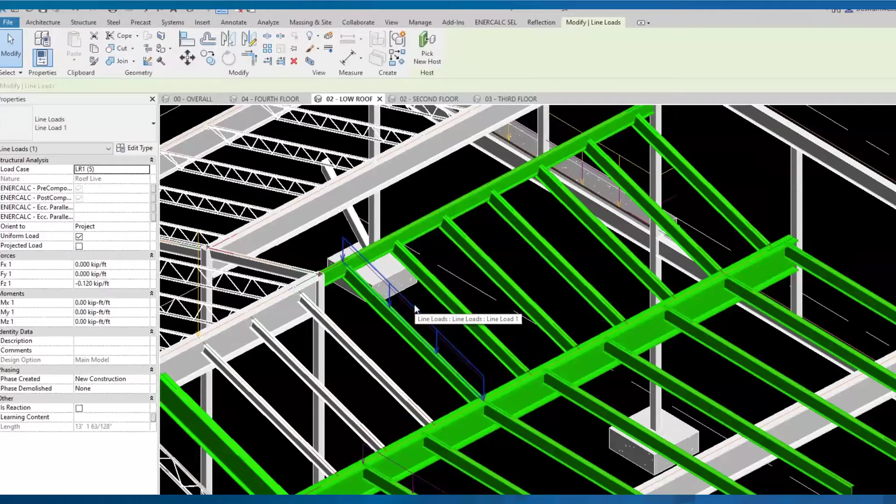And this is also true of more subtle changes. For example, moving an adjacent bounding element, which then alters the tributary width of a designed beam. This is also true of more broad scope global changes like changing an area load on a floor. Changing that area load magnitude then causes broad scope warnings across many elements that were affected by that area load. It's also true of cascading load path situations where if you make a change near the top of a load path, then similar to the native load linking workflows that Mac demonstrated earlier, you'll be able to see warnings cascade down the load path, stay on top of what changes have occurred.

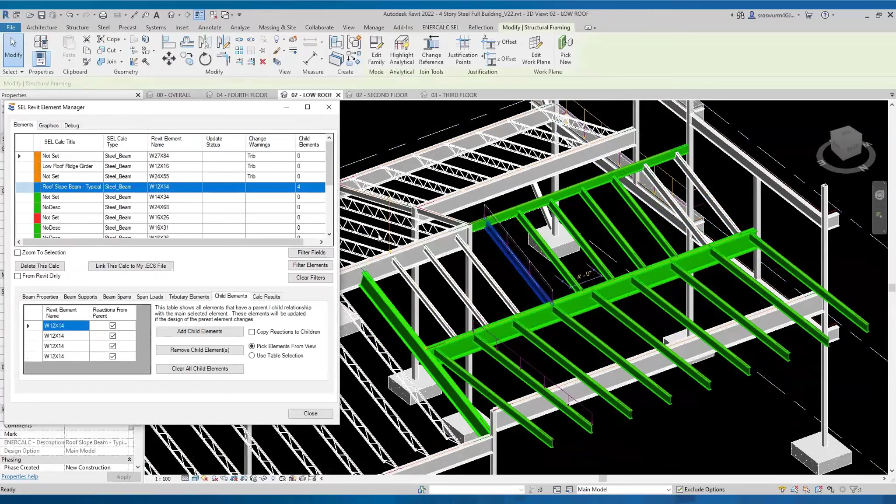And this is true also of modifying parent-child relationships. So for example, if you edit existing parent-child relationships, remove existing children from that list, that will remove the associated reactions. That'll allow you to see warnings on the girders which supported those reactions. And the same is true of pushing changes from your ENERCALC calculation environment back to the Revit environment in real time. For example, changing a load magnitude, which changes the reaction force, will then result in cascading warnings to the supporting elements.

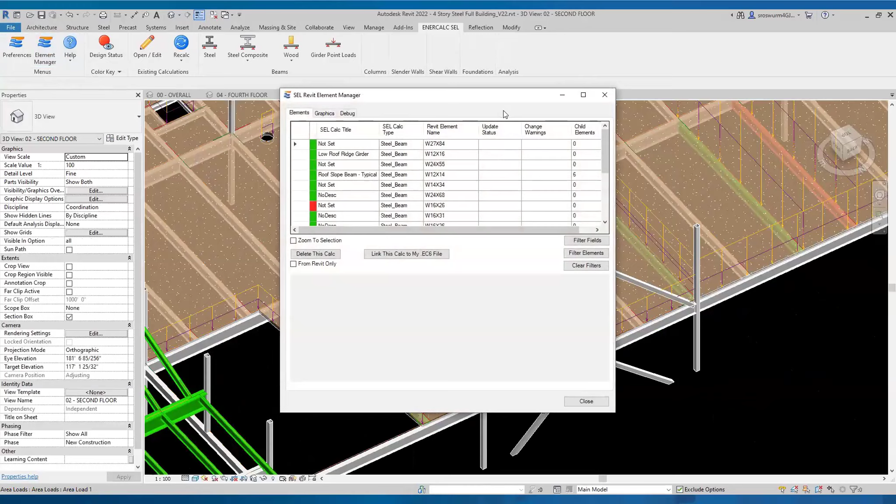Now, when those changes do occur, you obviously have the ability to open that calculation for editing and go all the way back into the calculation view like we were before, but you also have the ability to regenerate and recalculate on the fly. So for example, we're going to look at an interior beam right here where we can open the calculation report and see that we have a W16 with a 0.57 unity check. And if someone on the engineering team were to make a change to this beam, for example, just manually toggling the section size from right here in the Revit model, we would see a warning status on that beam. And then we'll be able to actually regenerate or refresh that beam calculation on the fly by simply using the recalculate control natively on the ribbon bar.

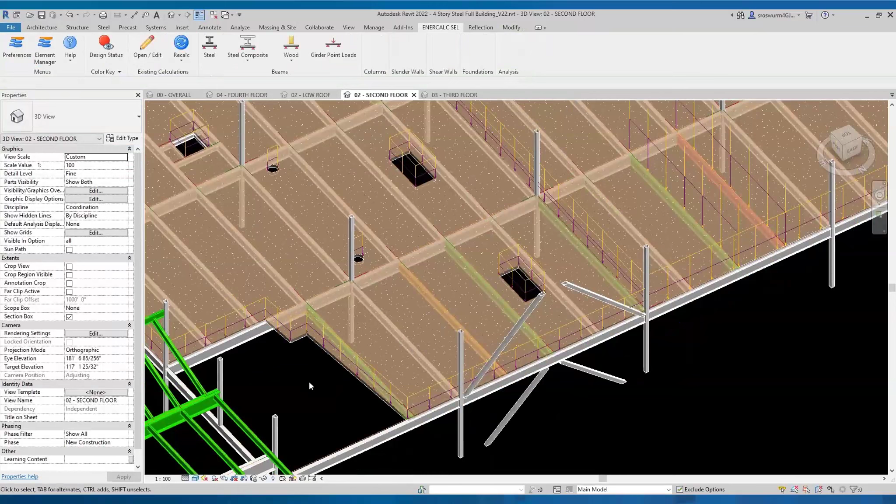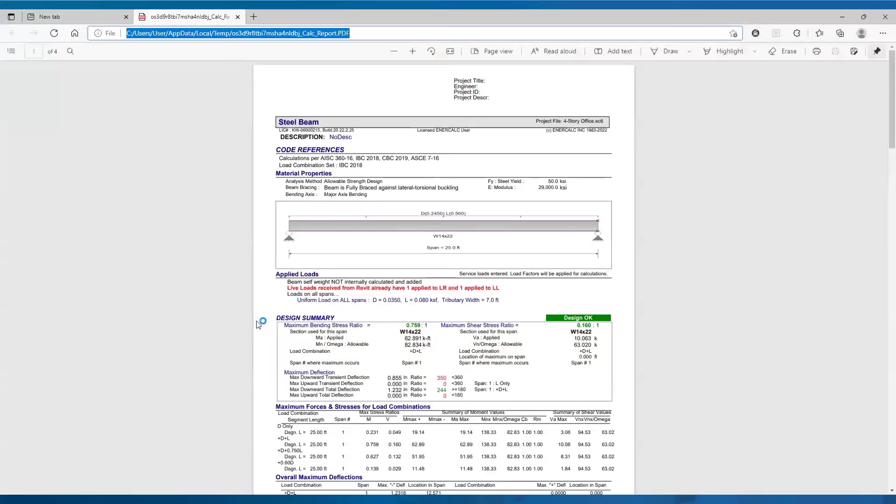And so ENERCALC for Revit will call out to ENERCALC, get you updated results for that beam, and then you'll be able to go back to your element manager, retrieve the calculation report on the fly, and see the new information for the design of this beam, which is now W14 with a 0.76 unity check.

Now that was a single element example, but you can do the same thing in broad scope, multiple change situations where you have many changes that have occurred. You can actually preview the load path that ENERCALC for Revit uses to recalculate these elements on the fly. And then you can trigger a bulk recalculation that will actually execute those recalculations in the appropriate order, which preserves the load path, starts at the top of the load path, recalculates the elements sequentially, and then provides you with a summary of results based on that recalculation at the end.

So with that, I want to go ahead and toss it back to Mac for some open Q&A with the audience. We're going to go ahead and go through the questions that you guys have and any other questions that Mac wants to cover. Seth, thank you for an informative presentation. We got a few questions here about ENERCALC for Revit. So let's kind of dive into some of those.

So one of the questions that we got is, do I need to apply the loads directly in Revit, or can I apply them in ENERCALC? And this is a little bit more towards the idea that a lot of people are not familiar with how to apply loads inside Revit, and also they really don't want to be messing with that. So what do you think about this?

Yeah, great question. So ENERCALC for Revit, fundamentally, because it's designed to be a productivity tool that helps you do what you already do and what your team is already familiar with, is designed to have complete interop with Revit loads and have complete flexibility for you to send raw geometry from Revit, for example, send a beam with no loads and create all of your loading information in the ENERCALC interface the same way you would a manually built calculation. So the answer is yes, you can absolutely do either one of those workflows, meaning you can use load generation capabilities, you could use native Revit load capabilities and send an element with loads on it, or you can launch an element with no loads whatsoever and only get things like critical geometry, material properties, and so on into your ENERCALC interface, then create your loads in ENERCALC and proceed with your design accordingly.